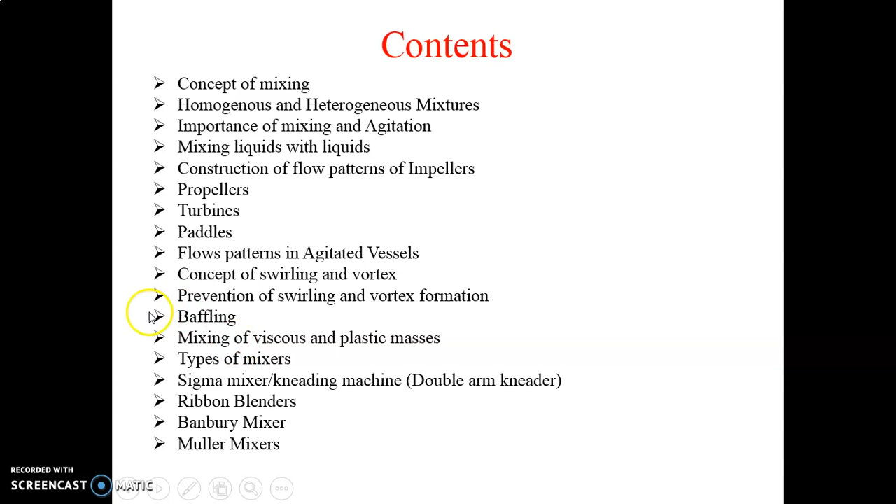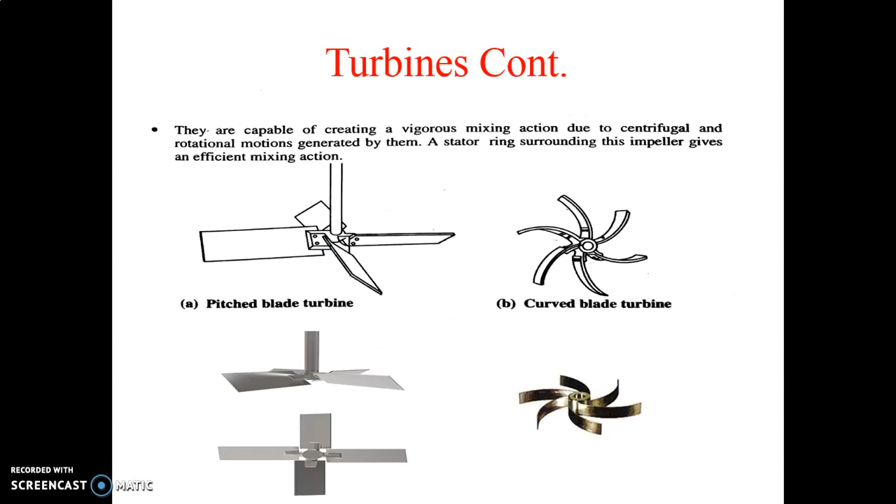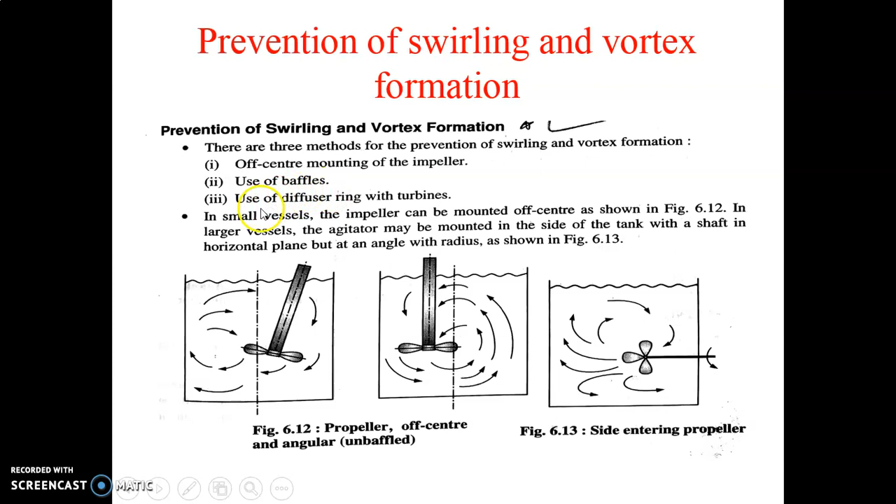In the last lecture I discussed the prevention methods of vortex formation. Off-center mounting method was discussed in the last lecture. There are two methods remaining out of the three methods we were discussing. One method is completed, that is called off-center mounting of the impeller. The second one is the use of baffles, and the third one is the use of diffuser ring with turbines.

Use of baffles means vertical strips are incorporated in a mixing chamber or vessel, so that will prevent the vortex formation. This is called baffling. These baffles are used to prevent the vortex formation.

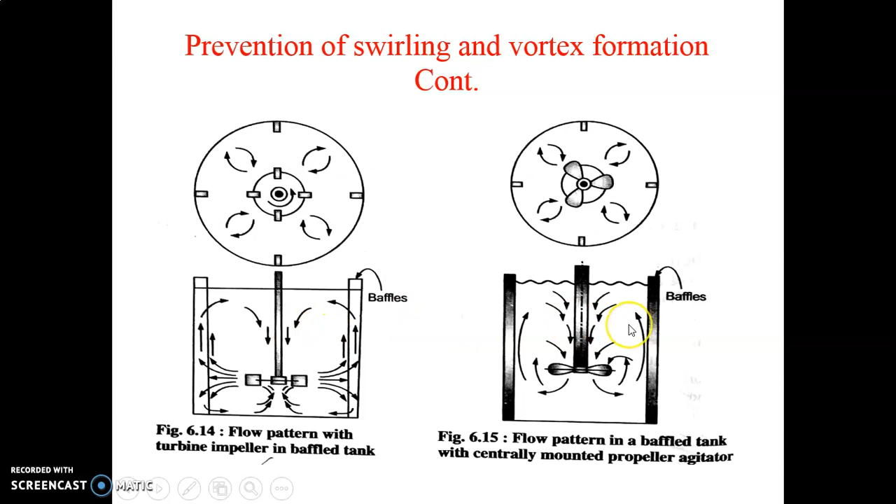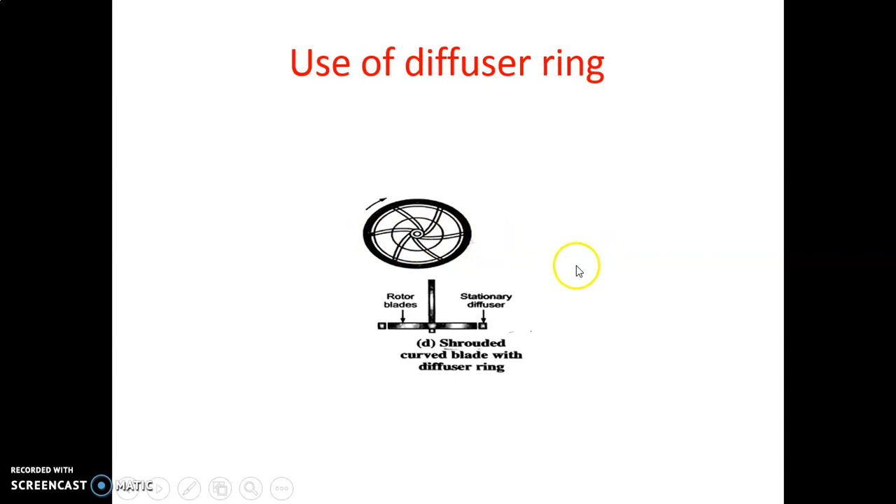The third method is the use of diffuser ring. In the impeller there is a ring provided, so this is called a diffuser ring. If we use the diffuser ring in the impeller, that also prevents the vortex formation. So these are the three methods of vortex prevention.

The next part is the mixing of viscous and plastic masses. Viscous and plastic masses means sometimes the material, like plastic material or rubber type material. If you want to mix this type of material, then there are special types of mixers used.

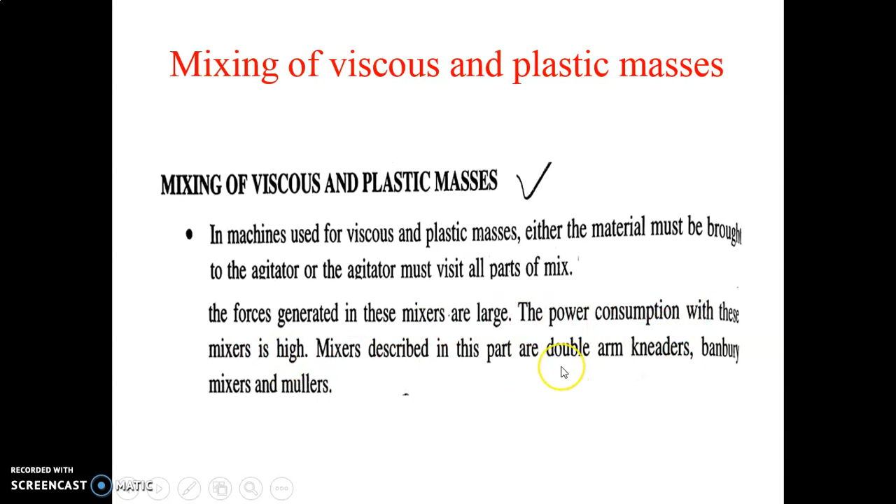These are the double arm kneader, Banbury mixer, and mullers. In these mixers the force generated is large and the power consumption of the mixer is high. So double arm kneader is also called a sigma mixer.

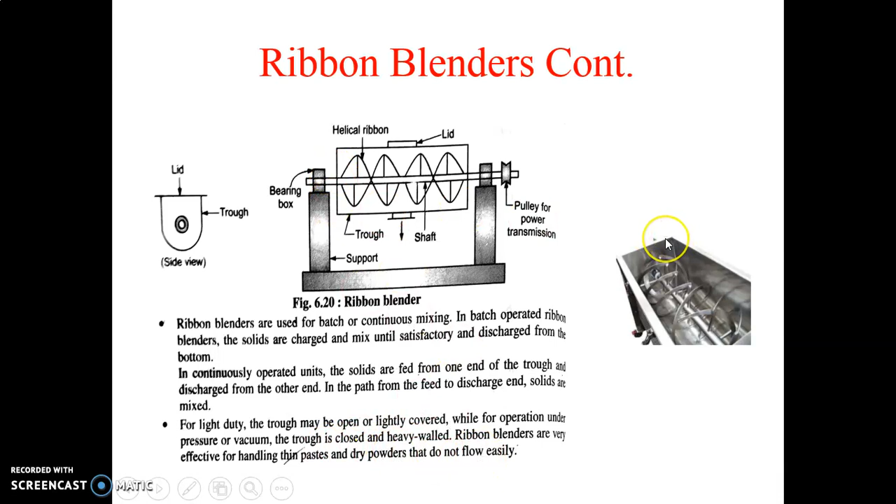The next one is the Banbury or Banbury mixer.

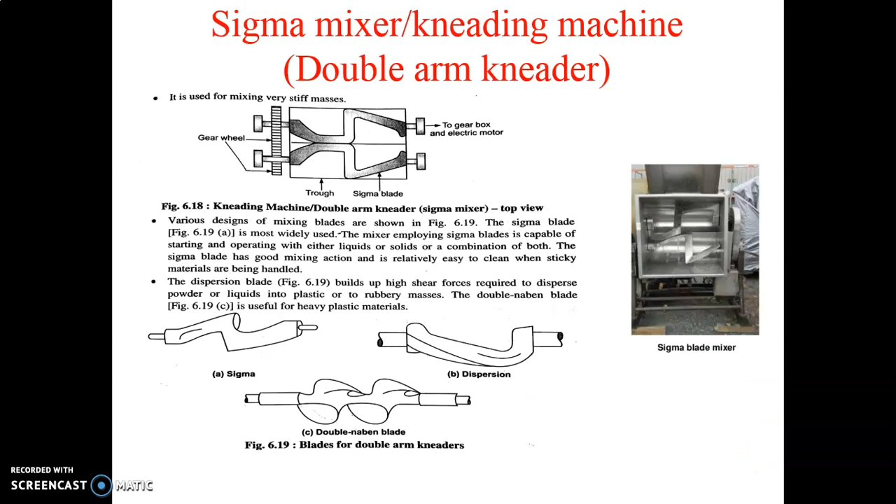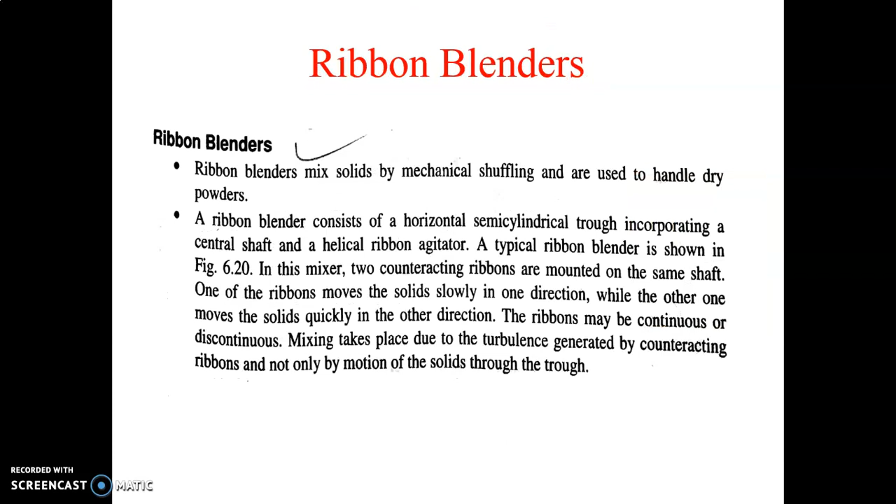So these are the three mixers which are used for the plastic or rubber type material or mixing of the paste. First one is the Sigma mixer, then another one is the ribbon blender, and third one is the Banbury mixer, and last one is the Muller mixer. So these four types of mixers are used for mixing of heavy solid, paste, dry powder, etc.

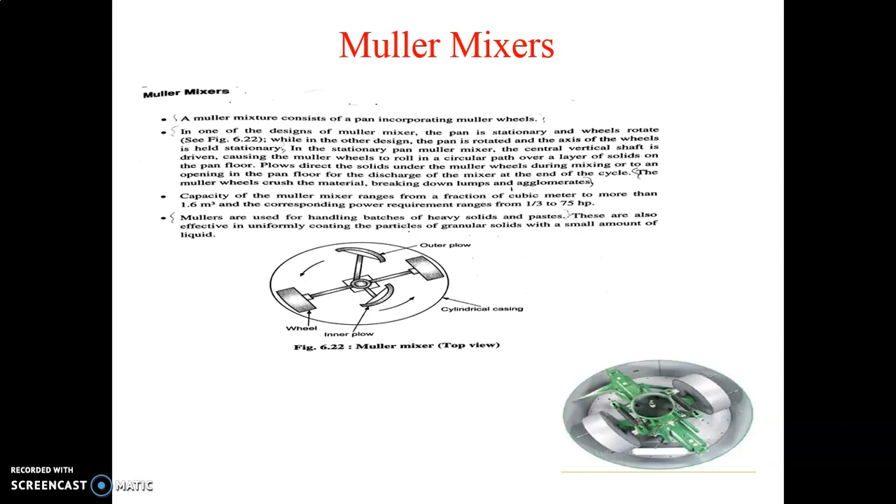So I had already discussed what are the different types of impeller: propeller, turbine impeller, paddles. So you can write that answer here and draw the sketch.

Then state the methods of avoiding vortex formation in the agitated vessel. This part I had already discussed in this lecture, that off-center method, then use of baffles, use of diffuser ring. So that answer should be incorporated here.

Then next one is draw the flow pattern with the propeller and turbine impeller. So the flow pattern is already discussed in this mixing chapter. So you have to write the answer here.

Then explain the construction of two-arm kneader. That means sigma mixer, you have to write here.

Draw the sketches of different blades used in a kneading machine, that means two-arm kneader. So that sigma blade, dispersion blade, and double-naben blade. So you have to draw the figure.

And in the last question, you have to write the construction of ribbon blender and Muller mixer. So that part I have already discussed here.